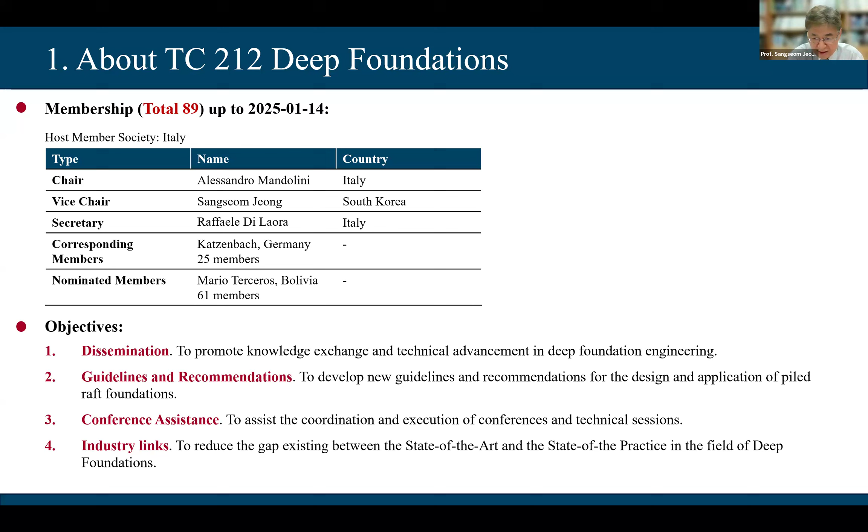Our committee is organizing some activities worldwide. The most recent event was held in Belgium on May 21st this year as part of the SAGE SAND project. Later, a load blind prediction competition was organized by Dr. Mandolini. The competition focused on the prediction of the lateral load deflection response of two hollow steel monopiles for wind farm foundations. The competition participants came from over 10 different countries.

And for another prediction purpose, an ultimate capacity assessment pile prediction event was organized by Dr. Bengt Fellenius regarding the forthcoming static loading test on a driven 18-inch pipe pile in Mobile, Alabama. The survey was conducted among 94 participants from 26 countries to ask for pile head load movement curves and force distributions. And also there's the ISSMGE Sydney conference.

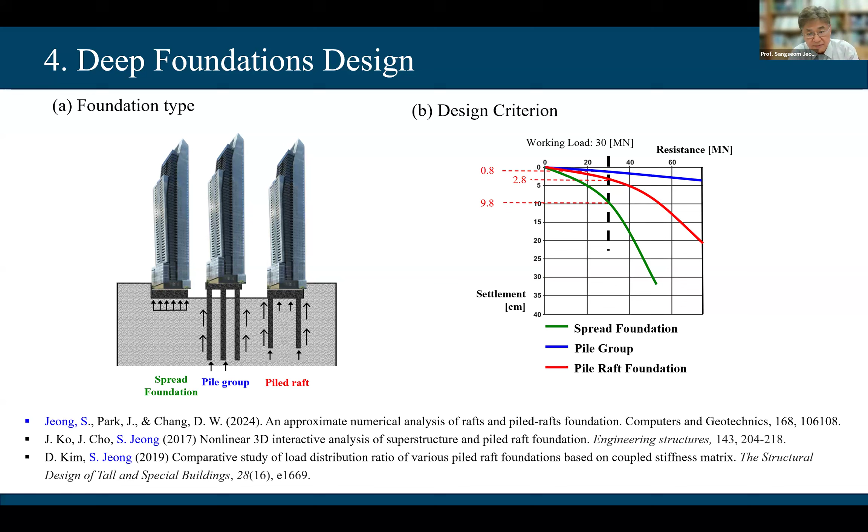Let me introduce interactive analysis. You can see in the left figure there are superstructures and substructures. We can analyze them all together through interactions, which is called interactive analysis.

For this kind of interactive analysis, we need to consider raft flexibility. It's very important to consider the raft flexibility. By considering the flexibility and deflection of the raft, we can overcome some limitations of existing methods. The primary limitation of existing methods is the membrane effect of the flexible raft.

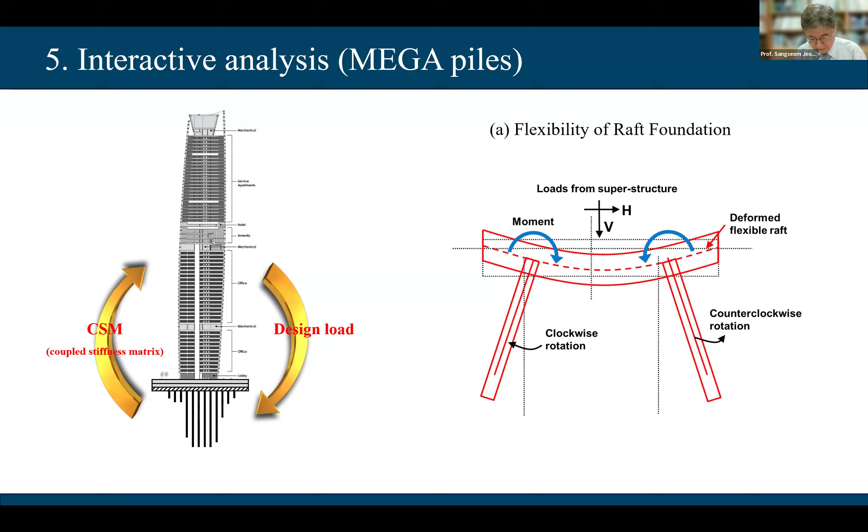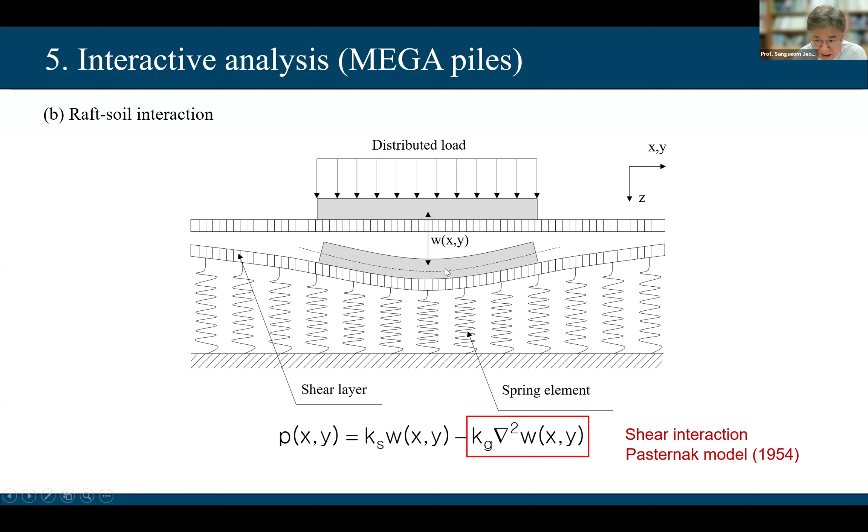In the present method, a numerical technique is developed to combine the soil and pile head stiffness with the stiffness of the raft. Here I'm considering the raft's flexible behavior, taking the flexibility of the raft into consideration, and then including the soil support systems, to consider soil-structure interactions, involving the soil spring coupling effect.

The present method is proposed to improve the interactions of raft-soil-pile systems. Finally, we can propose an analytical method considering raft flexibility, including beam elements to model piling systems with linear or nonlinear soil spring systems. This is proposed as a model to analyze both flexible pile raft and raft foundations.

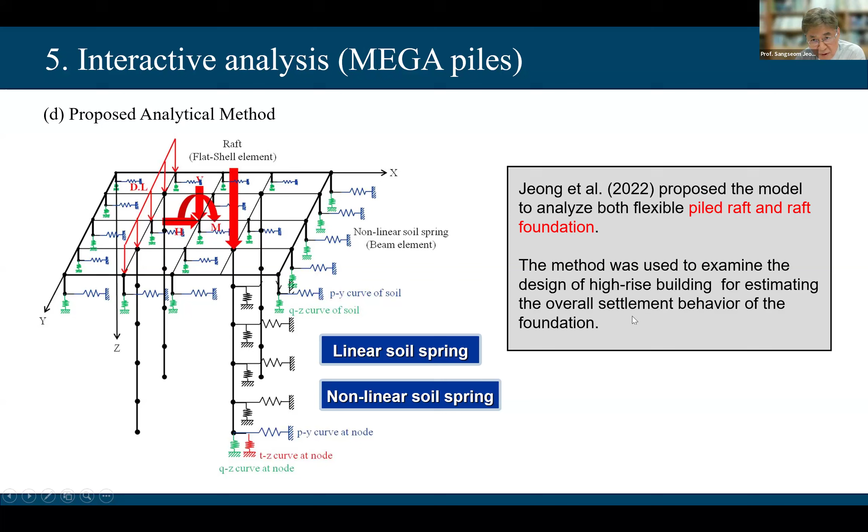This method was also used to examine the design of high-rise buildings for estimating the overall settlement behavior of the foundation.

Let's go into a case study of pile raft foundation, especially in weathered soil rock cases. I call this the Yonsei case. Let me briefly summarize. Here you can see the load distribution ratio of the pile raft foundation of the first engineering hall at Yonsei University, which was measured during construction.

In this case, the load distribution ratio of the raft portion was quantified. This figure shows the schematic of the objective structure and the portion of the foundation. The overall foundation of the structure consists of several independent pile rafts, and each pile raft has 5 test piles. The geometry of the raft is about 3.1 meters by 3.1 meters, with a thickness of about 1.1 meters. The field measurement was performed for about 300 days from the start of construction.

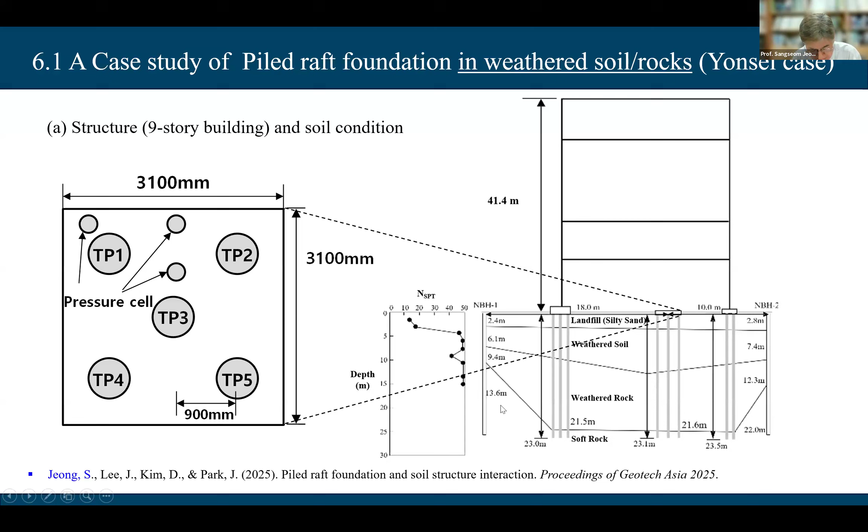This figure shows a schematic representation of the instrumented pile. About 70 vibration wire strain gauges were attached to the test pile, and 3 pressure cells were placed between the raft and the resting soil.

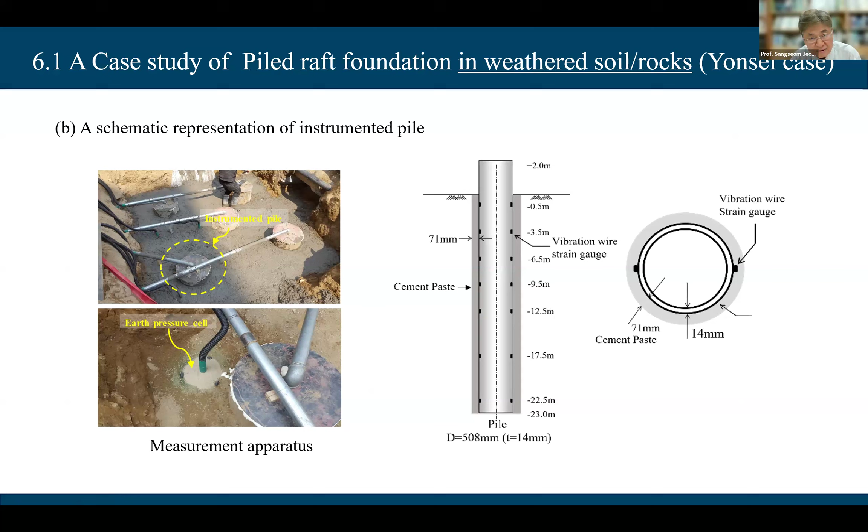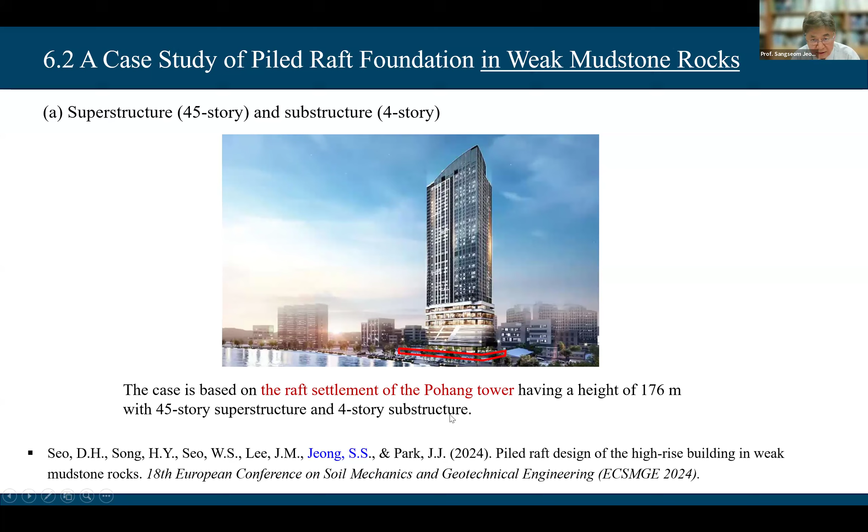Another case is the pile raft foundation with weak mudstone rocks, based on the raft settlement of the Pohang Tower in Korea. The tower was 176 meters tall, consisting of 45-story superstructure and 4-story substructure. Here are the construction stages.

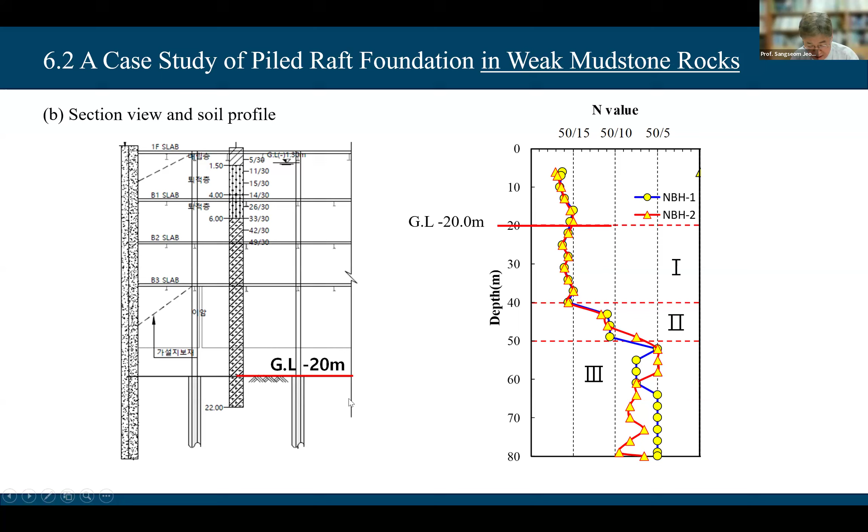Based on analysis using the pile raft design approach, we were able to reduce the pile lengths to an optimal length, from 45 to 30 meters, using pile raft analysis to satisfy the settlement calculations in comparison between pile raft and group piling. The settlement is fully satisfied.

We also checked member forces, especially axial forces and load sharing ratios. The pile raft can satisfy all of the member force requirements, compared to the group pile analysis, which does not satisfy the results here.

So by satisfying all settlement criteria and member forces... Sorry to interrupt, okay. The piles—oh, you're finishing, can you go back 2 slides? Sure, that's fine.

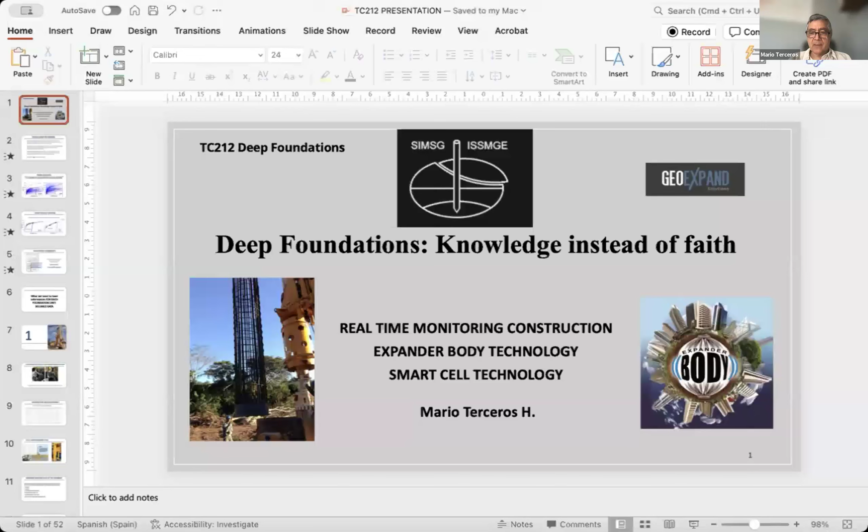I will speak more from the practical point of view, the industry. I will try to show quite simple concepts to be more practical for all the users of the industry. The name of the presentation is Knowledge Instead of Faith, and I will present three types of concepts that can help us move to knowledge.

Oh, what's happening here? I don't know why it's not passing to the next one. It's not shifting slides. Yeah, it's not, I don't know why. It was working well. Wait a second. I will...

What's happening here? Sorry, I will stop sharing, excuse me. I don't know what's happening here. Check it outside and then restart. Yeah, no problem.

Okay. It works, it works here. I hope it works now. Sharing... share, okay, now I will put it full screen since it's working here.

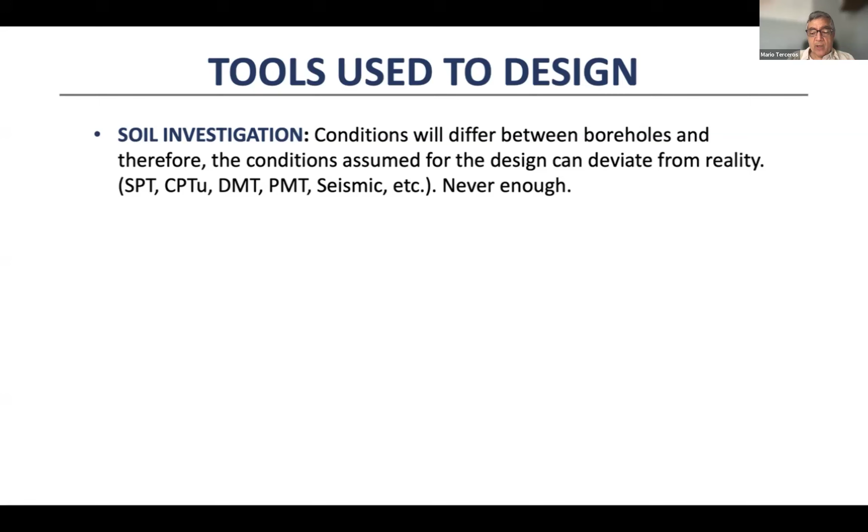Then with the soil investigation, we go to the soil model. And all what the professor presented can be derived from that. So what is the soil model we are using? The old-fashioned is, of course, to use just simple formulas, some experience. Now there are much more sophisticated mathematical models, but always we are depending on the soil investigation and the soil parameters, basically.

The other point to design that is a big problem in several places is that the designer decides what is the construction method, but it is not always respected in the field, mainly in the cast in situ piles. It's not the same to drill with casing than without casing, with mud, with bentonite, or with CFA, the normal one or the partial displacement CFA, and so on. So it's very important to respect what is included in the construction method.

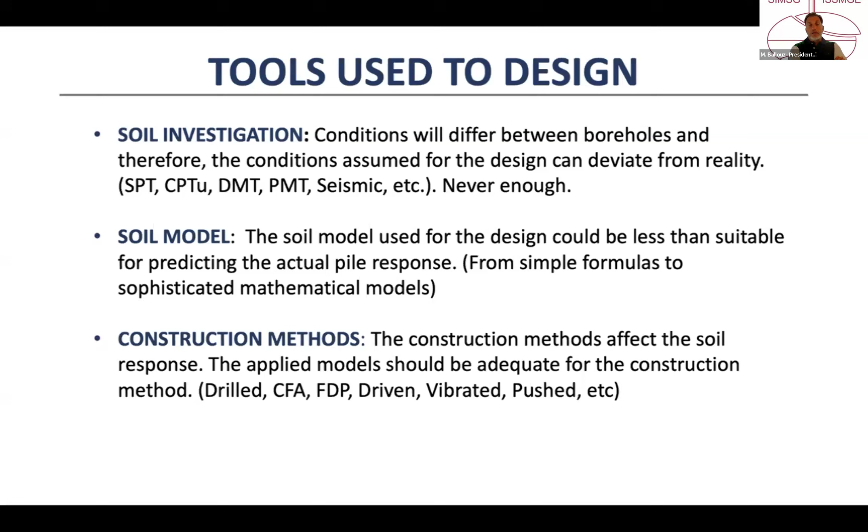Mario, I want to mention when I was doing research, we compared different construction techniques in the field just by forgetting the mud or the bentonite slurry over the weekend, simulating that the pump is damaged, and we came back Monday and poured concrete and did the same pile with good cleaning. The difference in capacity and even the curve was 4 times. I believe it. Totally. Unbelievable. Four times. Yeah, just to complement what you were saying.

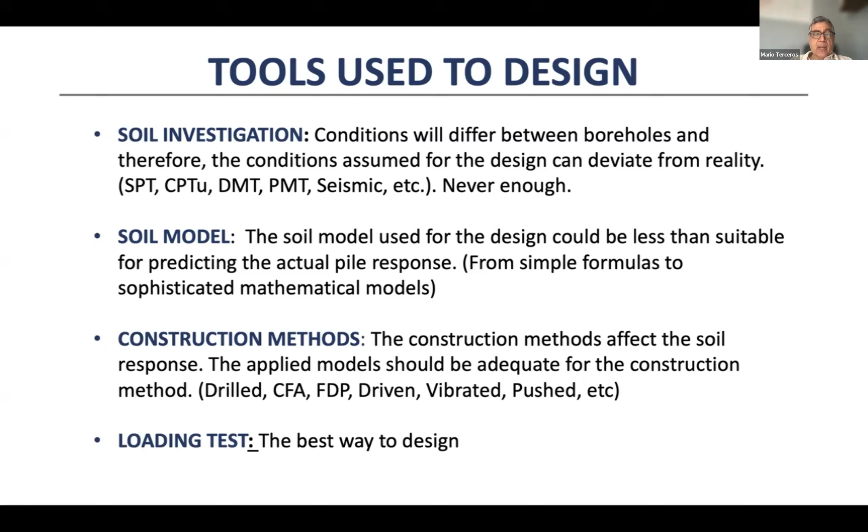Yeah. For example, we have measured, and high quality instrumentation is very, very important. Yeah, and that's because now we are using in 100% of our projects the full displacement pile, which provides 4.5 times more than the drill with bentonite. So the technology is very important, and of course, the loading test. If every single project would be designed with the help of a loading test, everything will be different. We are trying to do that in almost all our projects, but it's not always easy to convince the clients.

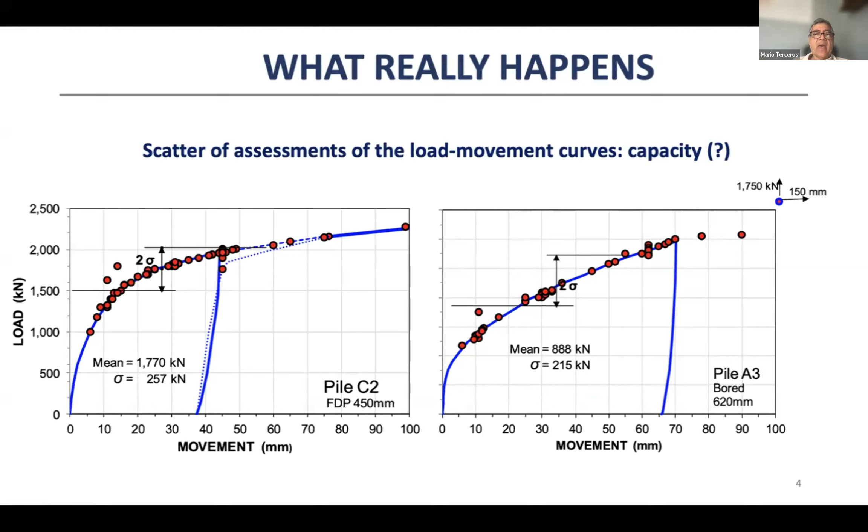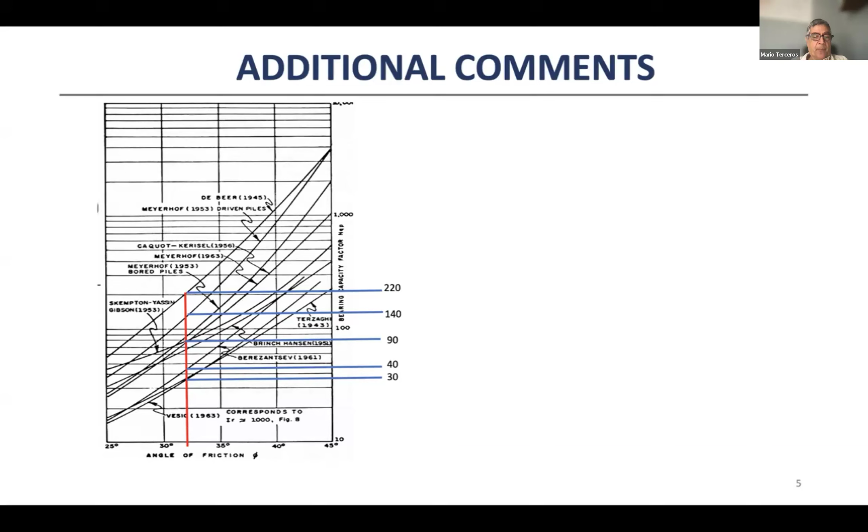Some comments. These are the very old curves for the tip resistance of driven piles for different authors. Depending on the author, you can have Nq of 30 or 220. Okay. Nobody's wrong, but the problem is what's happening here. First of all, we have to know what is behind the model that gave the curve. If we don't know that, we will use it in the wrong way.

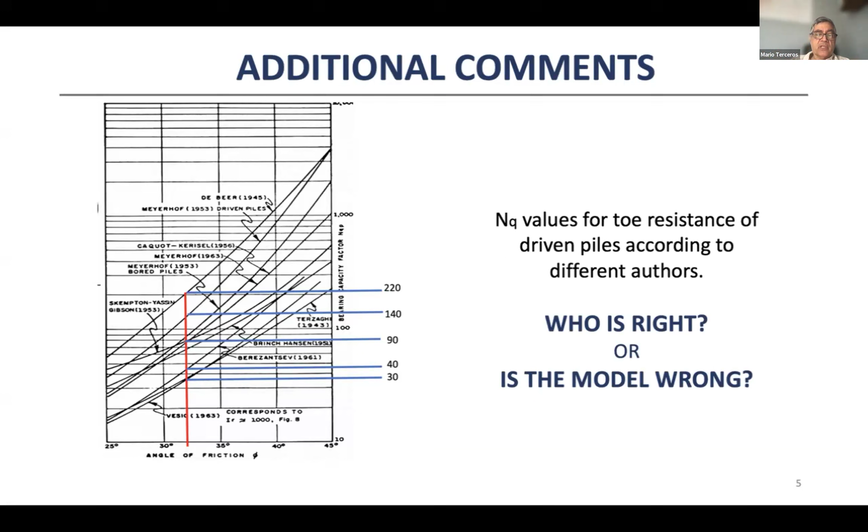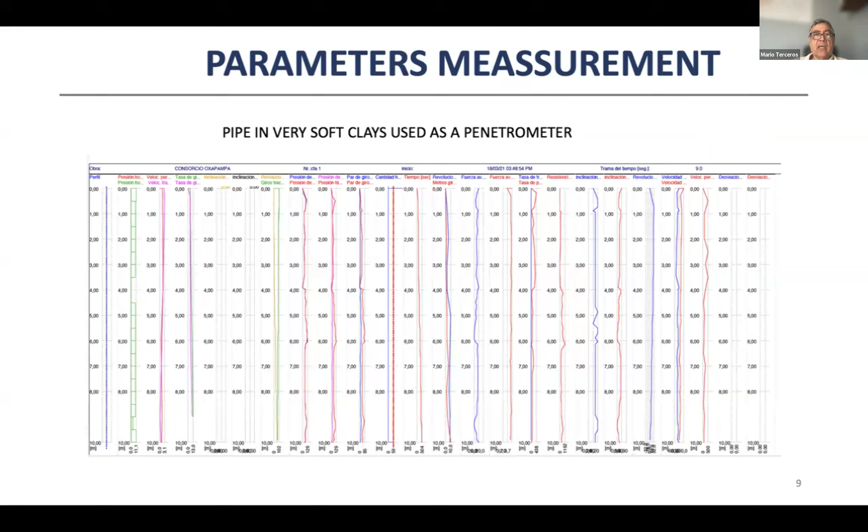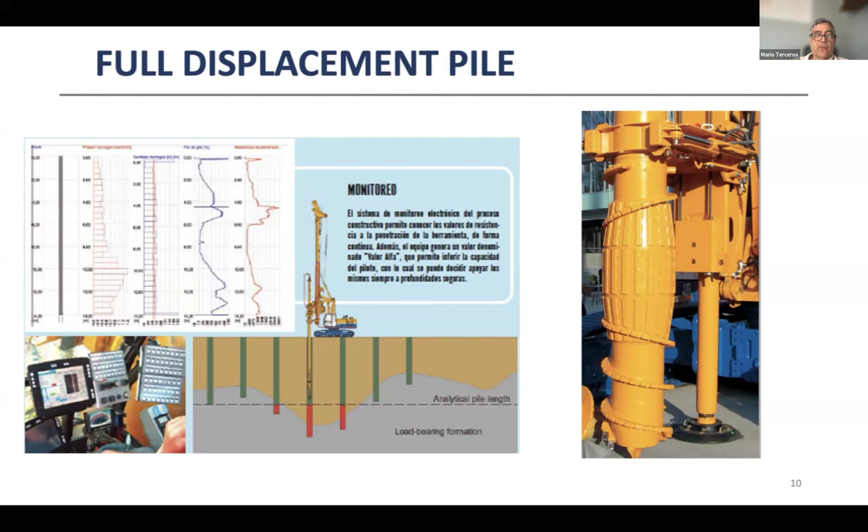In the other case, the full displacement piles, it allows us to see if the analytical pile length is right or not, because the truth is in the soil, it's not in the paper. So with a good support, we can do that.

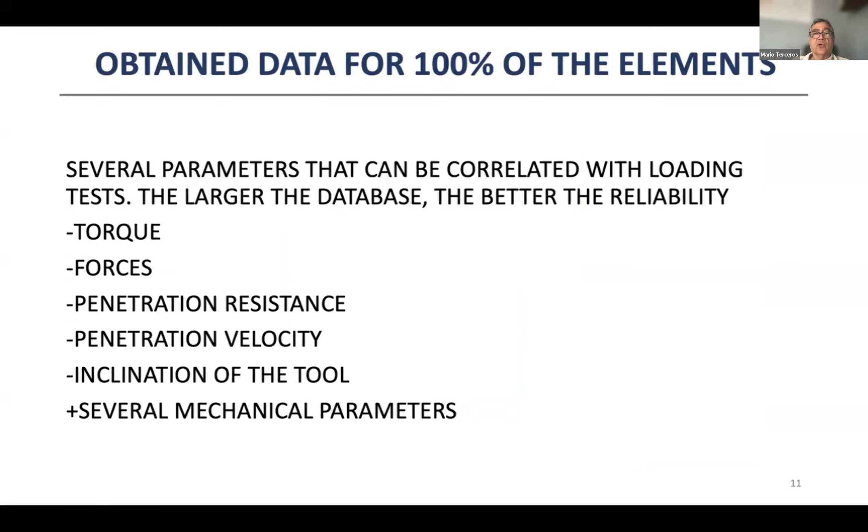So we get, for the 100% working as a penetrometer, the tool of drilling, a lot of information like torque, force, etc., which is very helpful once you know how to correlate with the values. So another question is, why don't we install systems that can give us information also in 100% of the piles?

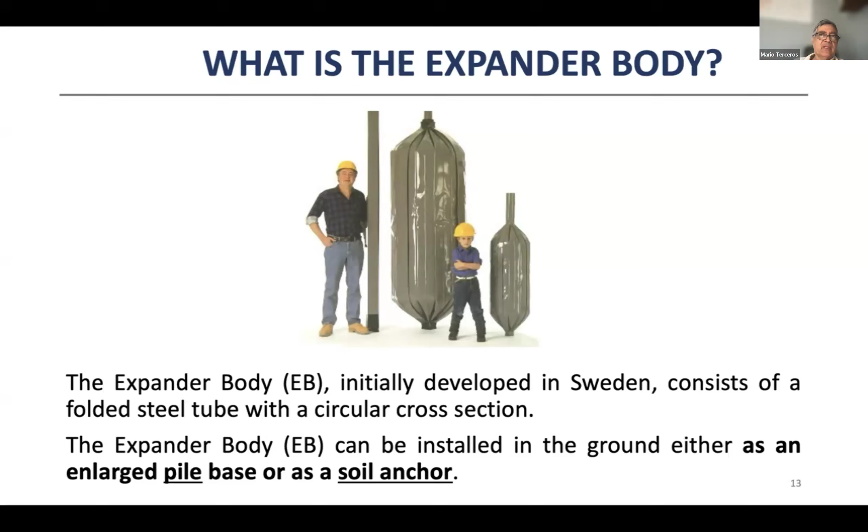This technology, the Expander Body, is basically a steel pipe that is folded, installed on the tip of the pipe of the pile or of the anchor, and then injected. So you pass from 12 centimeters to 80 centimeters. So you imagine the forces involved in such expansion. So it's not only because of the enlargement of the base, but also because of the compaction and the shear strength improvement, the stiffness improvement of the soil. So, okay, this is a very basic way of showing how it expands.

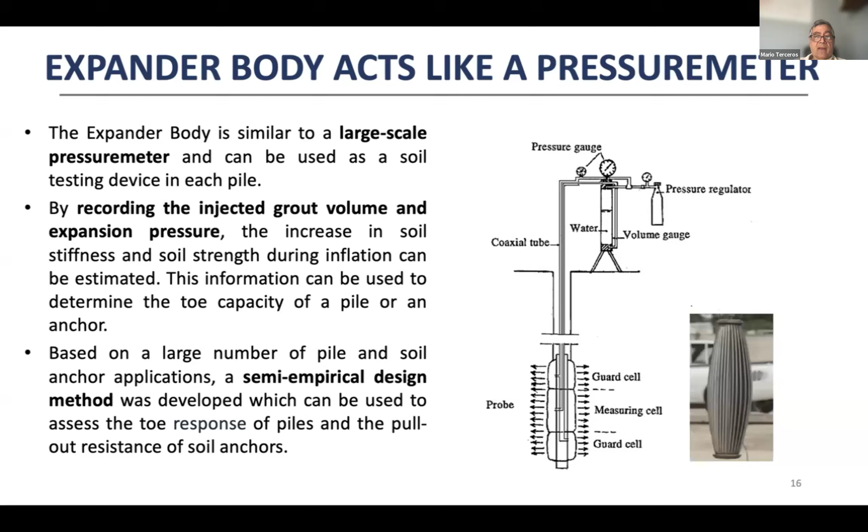What we do is we measure in every single element the horizontal stresses. And the curve I will show you, in the case of the anchor, is a very large displacement pressuremeter. Those are the standards, and the shape of the curve is exactly the shape of a pressuremeter, in case the pressuremeter would have been able to get to the limit pressure. So we have the initial phase, the elastic phase, and the yielding phase.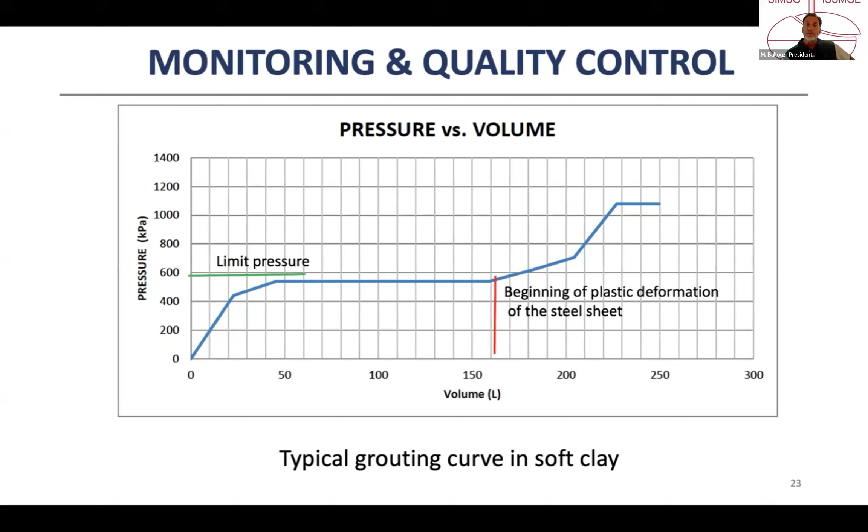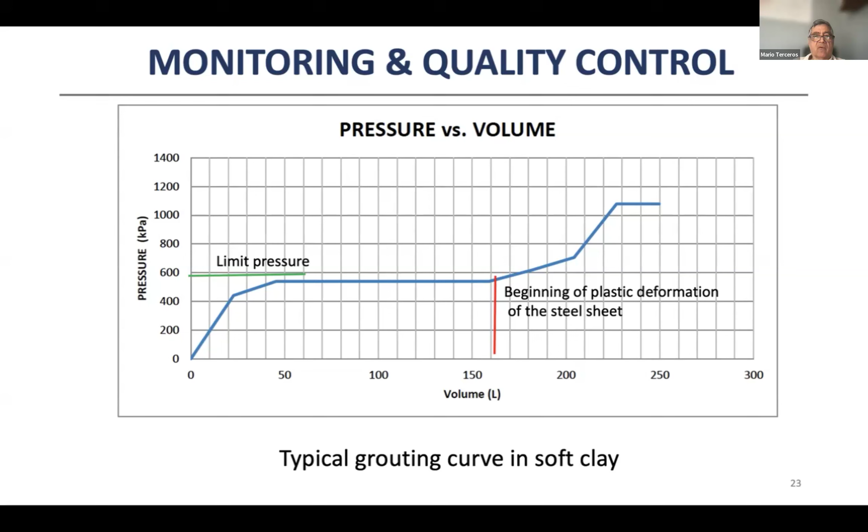Who's manufacturing those tubes? I barely saw Switzerland. No, it was invented in Sweden, and then we made an agreement with them because it's not produced in Sweden anymore. Now we produce in Bolivia and Brazil, and we have installed more than 40,000 of these elements.

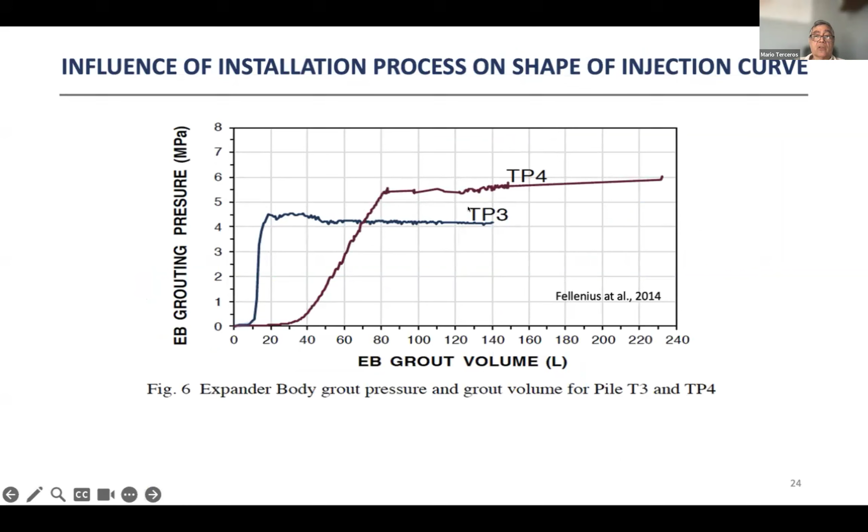Here's a very interesting case where we have a bentonite pile and a full displacement pile. This one is much shorter, and the results were also very, very impressive. In this case, we measured the friction to be 4.5 times less in the drilled piles than in the other one. Those are the models, it's not important.

How much in US dollars for each, let's say 1.2 meter? It depends on the quantity and things, but in our commercial experience, it costs double and it resists more than triple, that's a point for the clients to understand more clearly. And in case of micropiles, the increase is about 6 times. So it is important to design which size of expander body we want, because we have from 300 millimeters in very stiff soils or very soft rocks, up to 800 millimeters. And now we are developing the one with 1.2 meters in diameter.

But the price will be... Very exciting. Yeah, the price will be... I have one more question. Sorry, I'm so excited. Sure.

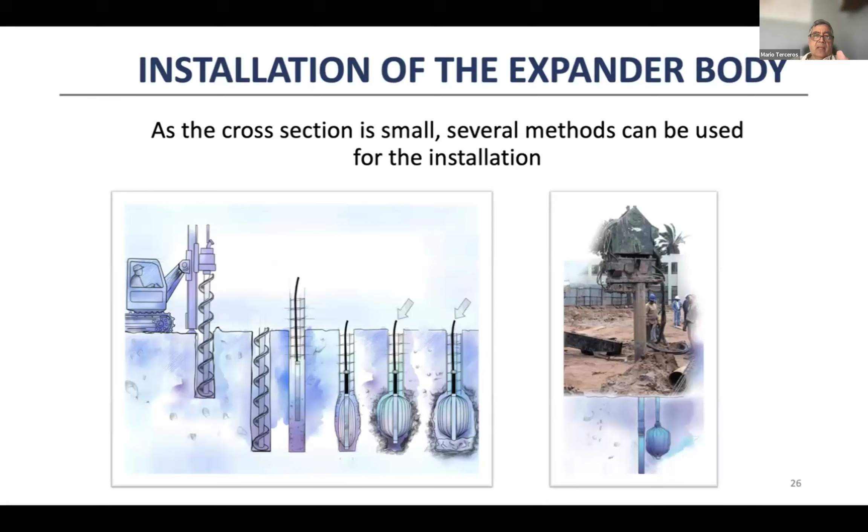I can see the benefit for uplift, does it take uplift? Is there a connection in terms of tensile steel, or just vertical compression? No, it uses anchors too. In anchors, I think I have an image here. First of all, you can install it with whatever you want because it's a simple thing. This one, the case on the right, was in Stockholm in very soft clays, where they pushed with a jack down to the granite.

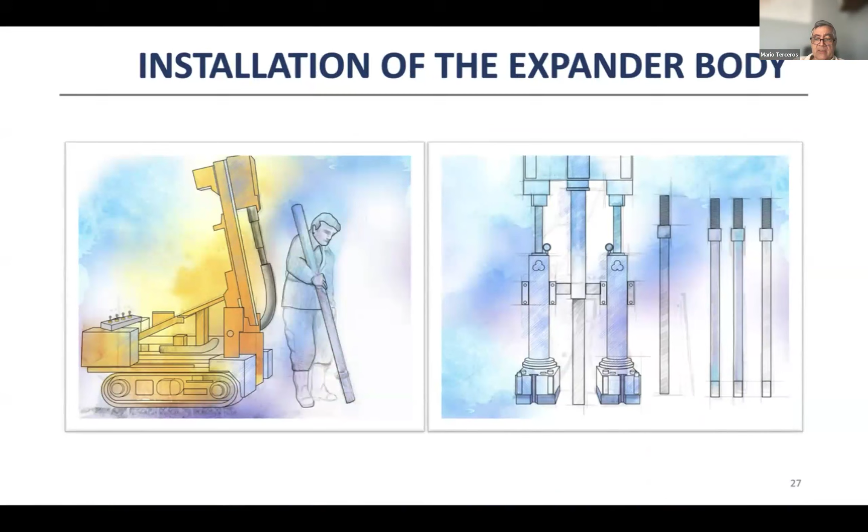So it's very easy to work in very small places or in big ones. But the tube can take tensile forces? Yeah, I want to show you that. It was originally designed for anchors. In tensile forces, we can increase 4 times against a typical anchor. And in compression, of course, it's also that.

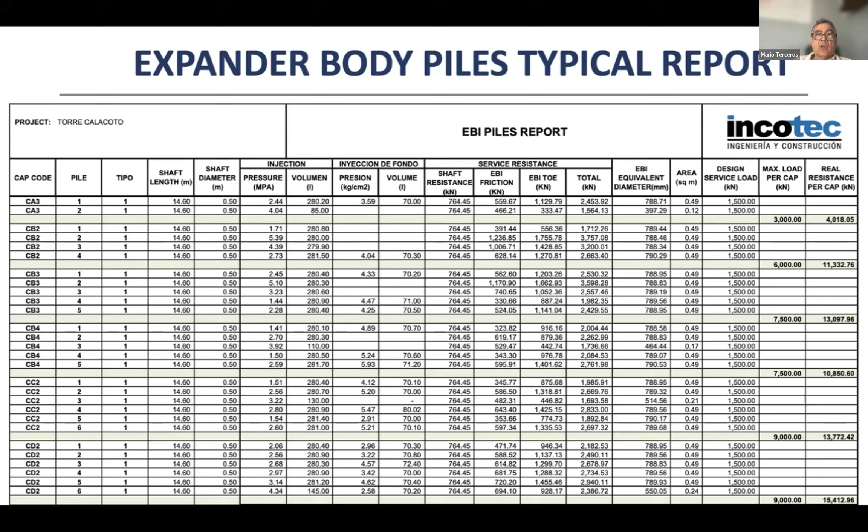This is a typical report we get with the expander bodies and with uplift design, so it's good for warehouses, wind uplift, turbines, and also for anchoring retaining walls laterally, and this type of things. We also have developed a post-grouting in very loose sands. It helps very much

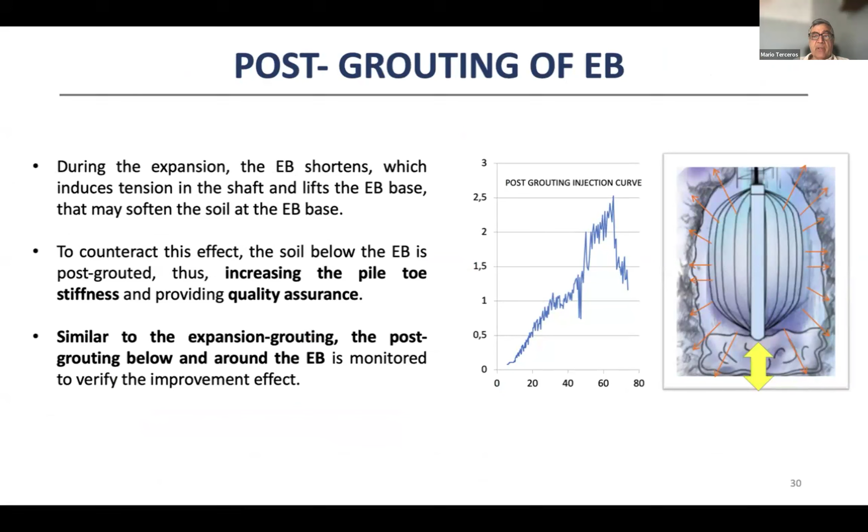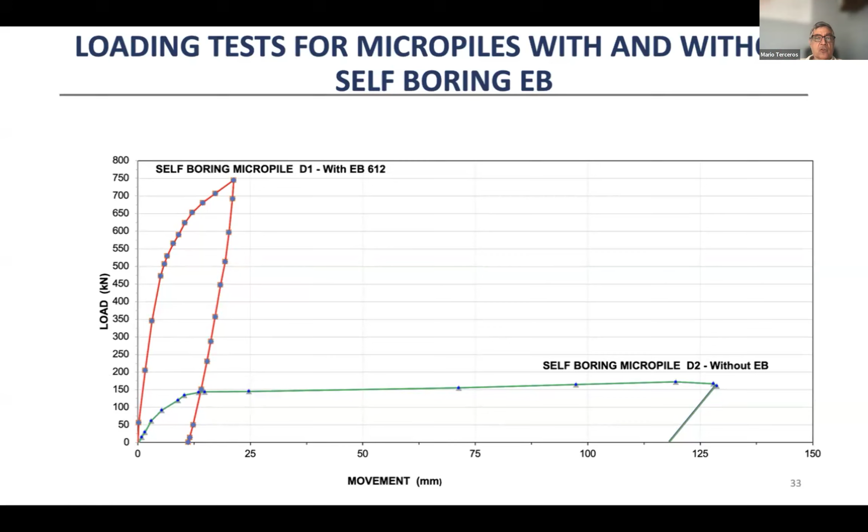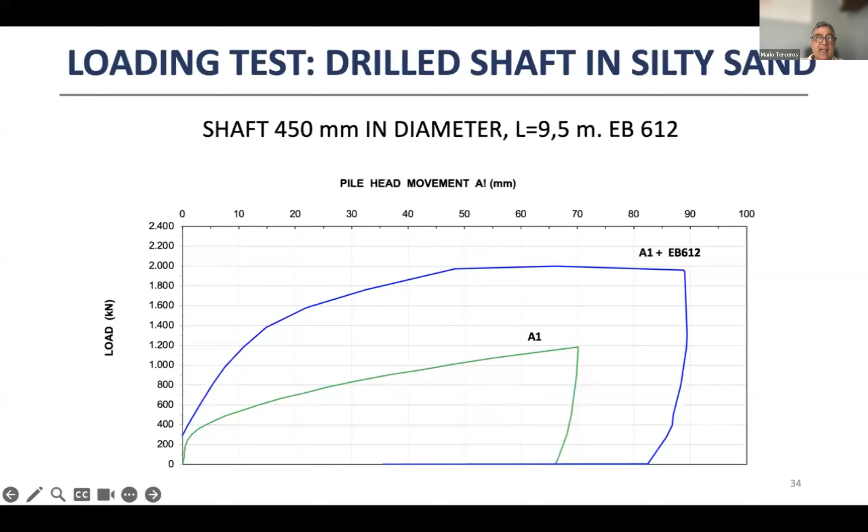in quite bad soils, because micropiles are mostly used where you have strong soils and rocks and so on. But in places where we have sedimentary soils and we don't have really a good resistant layer, the micropile is also a good solution. And with expanded body, the benefits are immense. This is a case with an expanded body in this experimental site that Professor mentioned. If we take, let's say, 25 millimeters, the one with expanded body is around 1600 kilonewtons, and the other is around 800. So it doubles the resistance even in a quite big shaft.

In anchors, here it is. It was a test in Boston. We have performed 2 projects in Boston, one for underpinning and another for a new project. And this was a test for anchoring. The blue one is the typical one. The other was with a small expanded body, and the other with a 600 millimeter expanded body. See the differences. So it's really very important.

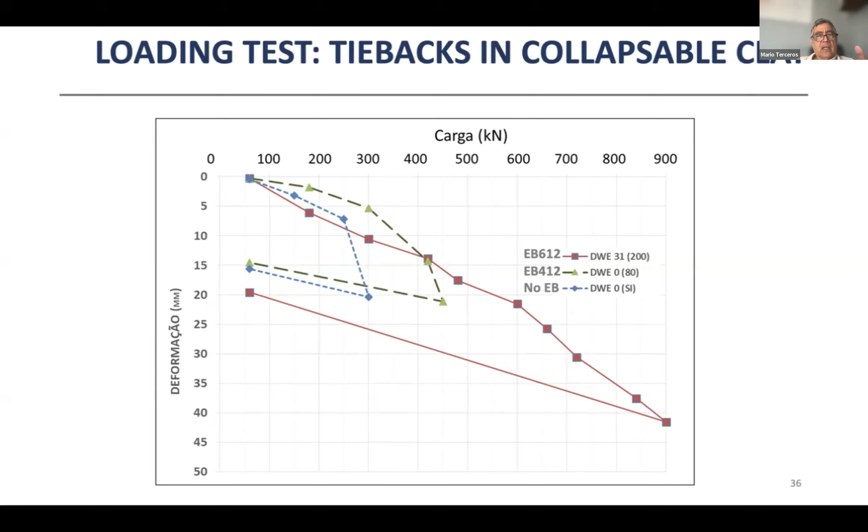Sorry, I'm talking too much. No, it's okay. How thick is the skin of this metal that expands? It's metallic, right? It's folded, it's a special steel of 1 millimeter thick. One millimeter. Yeah, it is really interesting, and I will send you later more information. I will Google it. You don't have to. I want to buy it anyway. I have several good papers, and there are several investigation papers performed by other people. So it's a very interesting thing.

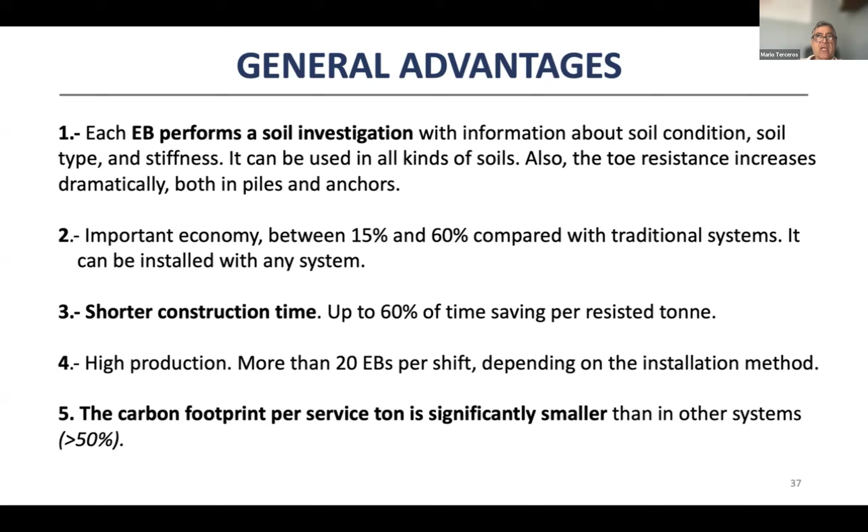So advantages. It performs a soil investigation at the tip because it is a pressuremeter. It gets immense economies in general, and as the service load is larger, you use less elements, so the time is also good. Construction time: the productivity with one of our power machines is always over 20 piles per day, typically 30. And the carbon footprint is important. Here I say over 50%, but we have measured in one case a reduction of 80% of carbon footprint because of the increased capacity of the piles. So what data do we obtain for 100% of the elements? Horizontal stress, injection volume, and pressuremetric curve, where we can get a lot of information. And the last one

is what we call a smart cell. It's basically an Osterberg cell, but we use it only at the tip of the pile, because in that case we compact the debris, then we compact the soil, and at this level we have already pre-mobilized and preloaded the soil. So when you load the pile, you will have the same deformation for the shaft and for the tip, and it will start to move really after the force we already put into the soil.

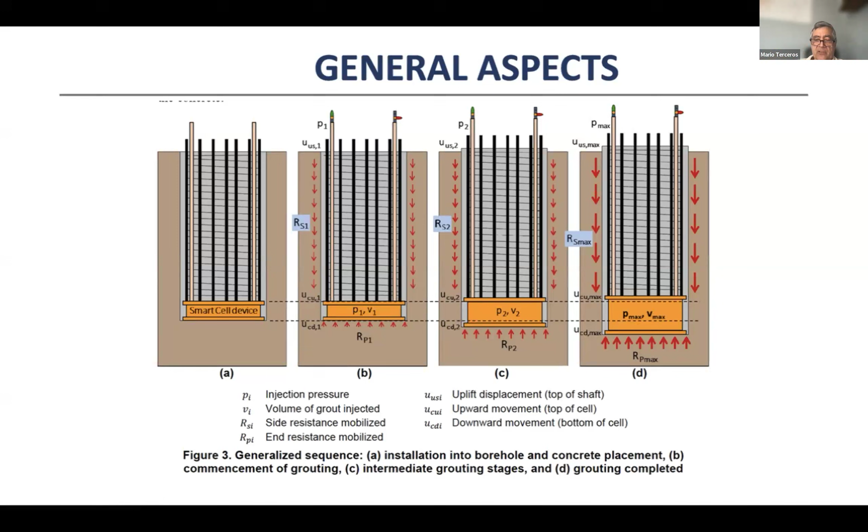So it's a quite simple concept, and the trick here is that we instrument every single cell with a telltale. So we perform a loading test for 100% of the tips of the piles. And in some cases, when we can mobilize the shaft, we also measure at the top, and we get the load movement curve also for the shaft.

Okay, those are just pictures. Here is a case where you see it start with 11 of stiffness, and at the end is 115. So it is 10 times more. And in some cases, we have measured an improvement of 30 times more of the stiffness, comparing with the pile in the original conditions. So, okay, here we have more details, but the question is that we really can get major improvements. Here in Bolivia, we have used it in several bridges with very good results.

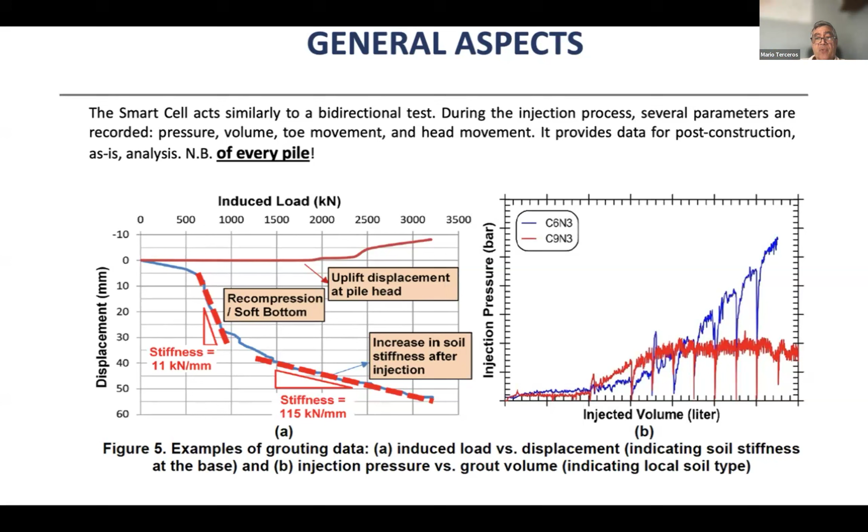And in Paraguay, we have designed a smart cell where the typical drilled piles have a very good cemented sand. The typical capacity or resistance, the service load, was around 40 to 50 tons. And with the cell, they are always over 140 tons. So it means that just using an element that provides this improvement of what we have measured during the construction, we can increase the resistance and lower the quantity and so on. And of course, from the carbon footprint point of view, the results are really impressive.

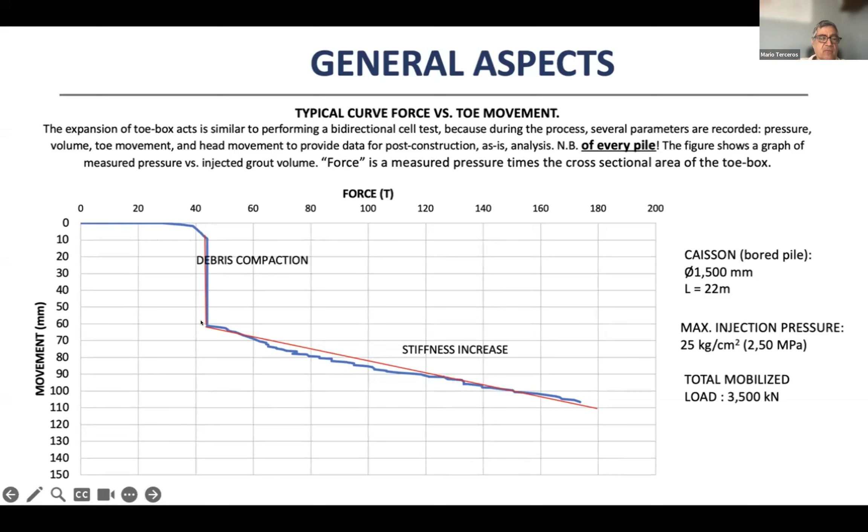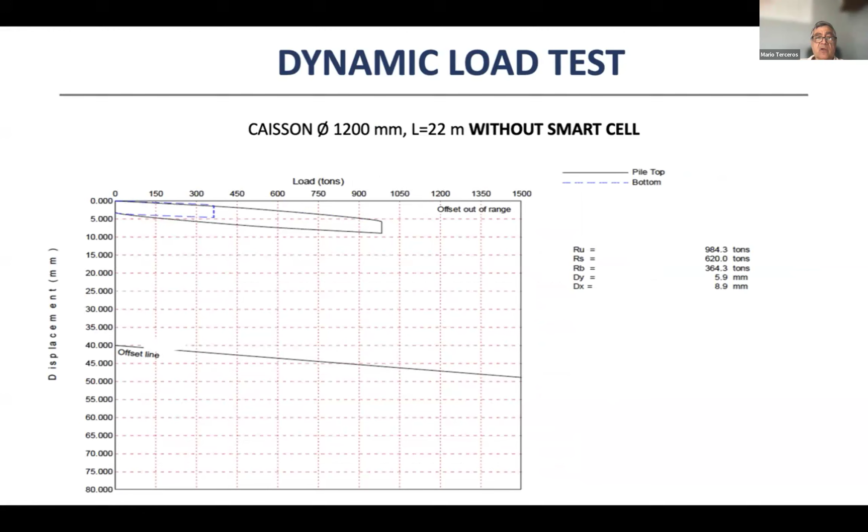Here's a case where, just to explain, this original part is because we used to have some welding points in order to know when the cell starts to open. Then you see the debris compaction with almost no increase in force, and then the stiffness increasing. In one case, we performed for one bridge a dynamic test in one pile with and the other without cell. The results were like it shows here. The tip was 870 tons for the one with cells, and it was 300 tons for the one without cell. So it means that just putting the cell, the resistance of the tip increased 500 tons.

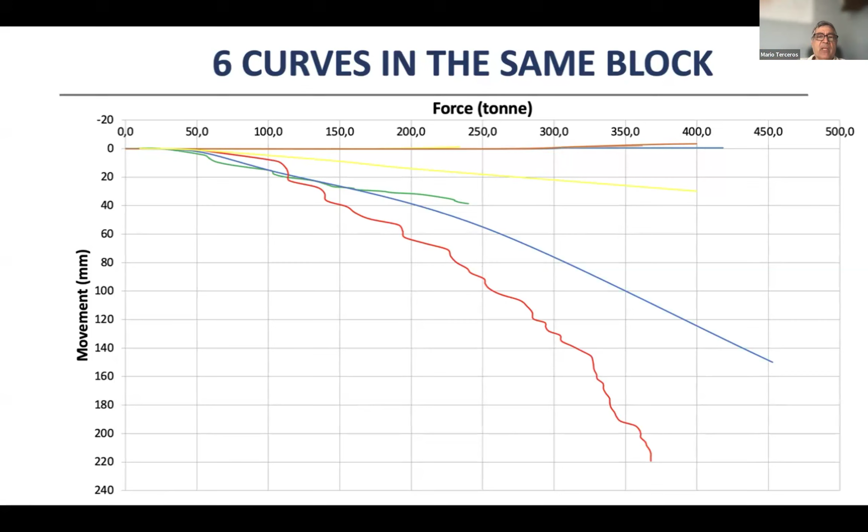And I show those curves because here we have 6 curves, one very stiff, another very soft. Those are the curves for just one foundation block in a bridge. So you can see the difference of the soils, because in those rivers that are quaternary rivers, the variation of soil conditions is immense. So here you can see that in case the solution would have been without these systems, it could have had some problems in settlement. So thanks to that, one more pile was included in this block in order to get basically no differential settlement in the block. So again, it's an investigation device.

Benefits: cost, time, quality control, and flexibility, because we have used it in very small shafts up to 1.5 meters. And with that, you can reduce the length, the diameters, and so on. One of the points I'm always focused on is trying to use piles as slender as possible and with the highest concrete quality possible. There, the benefits are immense, and from the carbon footprint it is also very impressive what happens with that.

So the idea was here what we obtain: again, in 100% of the elements, we know the vertical movement at the toe and the head, the vertical force, force at the toe, friction force, and we can get the load movement curve for 100% of the pile toes. So I have asked several friends that are designing what is the real resistance of the piles, and the answer is always, okay, in the one we performed a load test, it is that. And I say, and in the others? I don't know, is the answer. Here we know. So that's why I say we can pass from faith, we believe that they will behave like that, to knowledge. Now I know how they will behave.

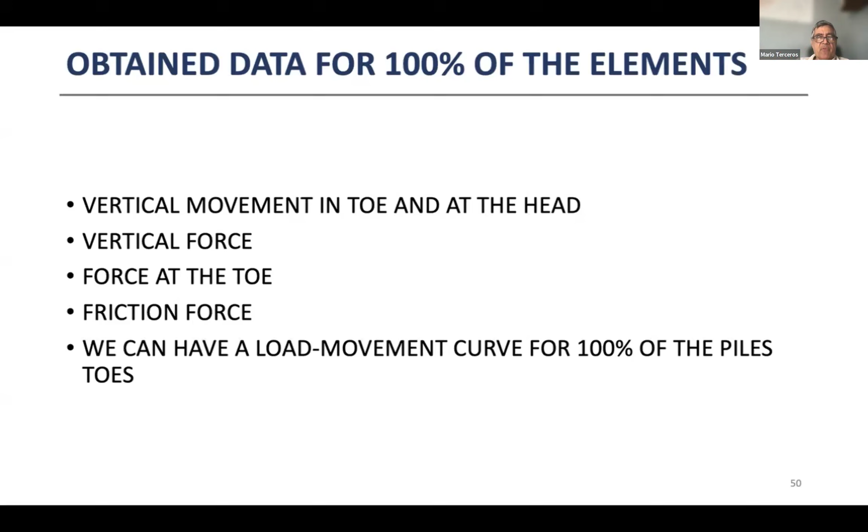So the idea is to show something more practical from the industry point of view. So what is the idea? To get all these benefits. Less time, economy, highest quality control, and so on. So I spoke fast because the time was not long enough, but thank you very much.

You did well. Great. Very exciting information. Thank you, Mario. Thank you. Floor is yours, Raffaele. Thank you. Thank you. Can you see my screen? Yes.

Okay, so I'm going to present some recent developments in pile foundation design with a particular focus on the behavior of pile groups under generalized loading conditions. That is a topic of particular relevance nowadays, since as civil engineers, we need to design structures and infrastructures that are increasingly demanding due to the environmental loads, the impacts of climate change, the great urbanization, and so on.

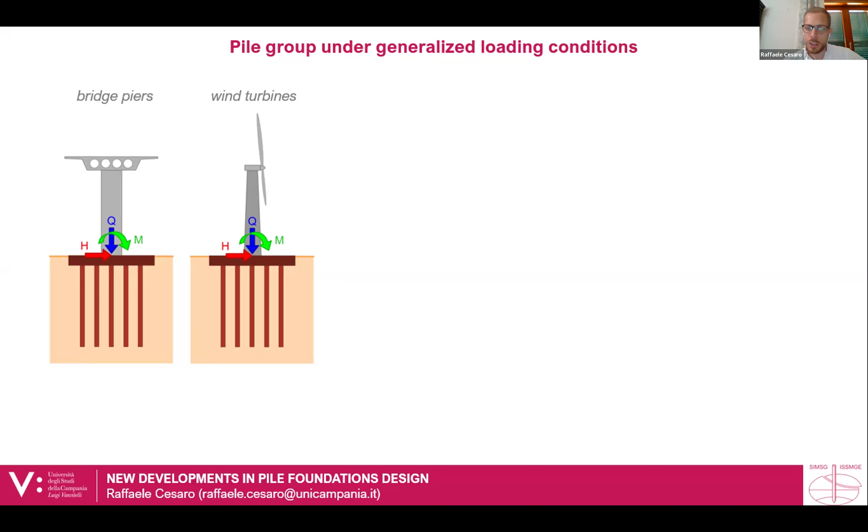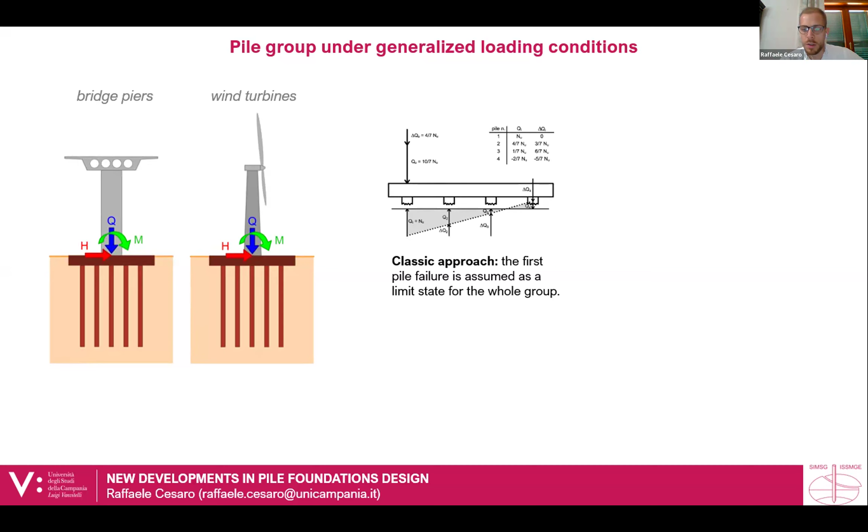So for a pile group subjected to a vertical eccentric load, according to the classic approach, the external load that produces the axial resistance achieved in the most loaded pile is considered the failure load of the group. But we know that this is a very conservative approach, since the ductility of the system is neglected. Indeed, the axial resistance is not achieved in the other piles of the group.

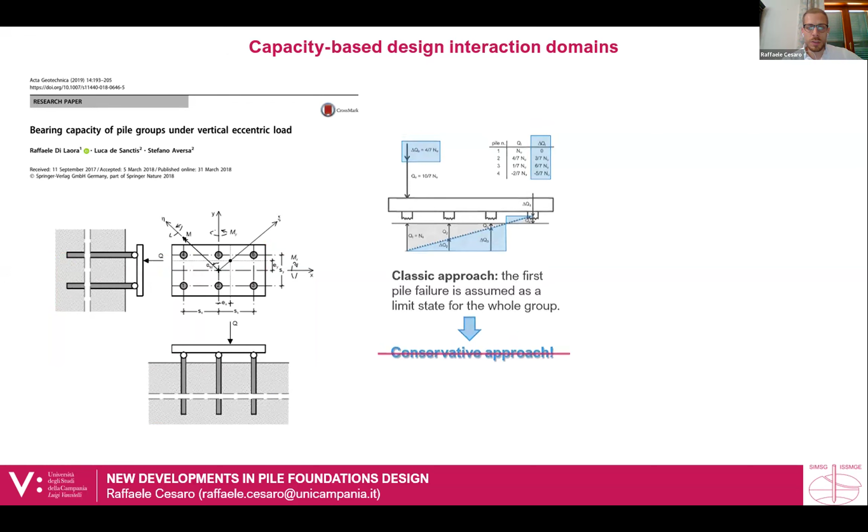So to address this issue, 6 years ago, in 2019, Professor Raffaele Di Laora and co-authors, Professor Luca de Sanctis and Professor Stefano Aversa, published this seminal work proposing an analytical solution based on the theorems of limit analysis for the construction of the interaction domains of a pile group subjected to a vertical eccentric load. This is based on simplified hypotheses. Indeed, the piles are modeled as rigid plastic independent uniaxial elements, and the contribution of the raft is neglected.

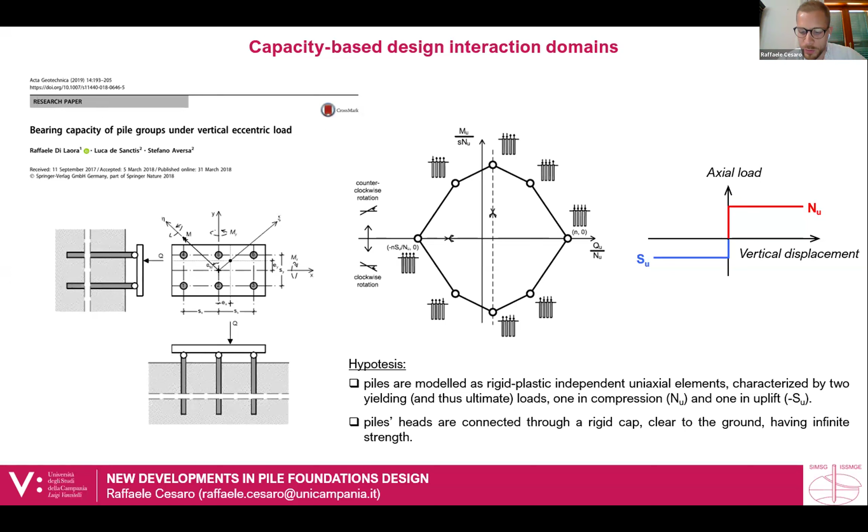I have to say that interaction diagrams are commonly employed in the design process of shallow foundations, massive embedded foundations, skirted foundations for offshore applications, and so on. But in piling engineering, the routine design is slowly adapting to this new philosophy. So let's look at the practical impact of this design tool. This is an application to a real case history. This is an onshore wind farm in southern Italy.

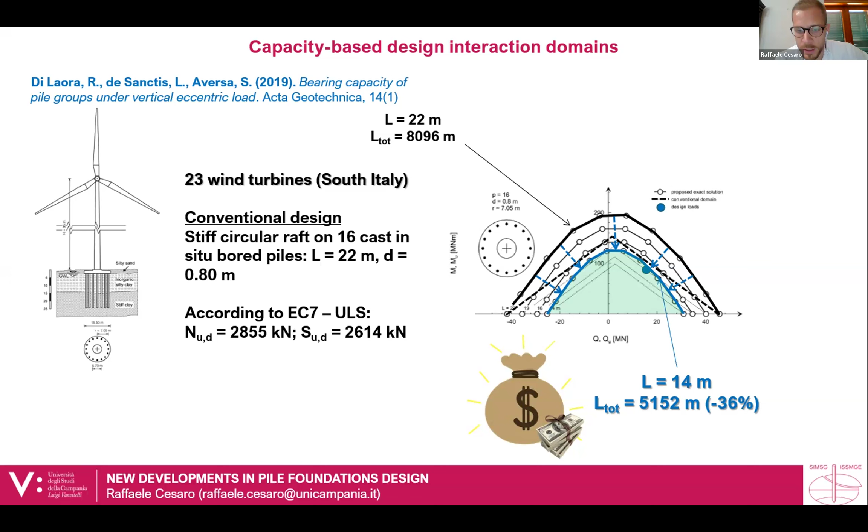So adopting this solution, we can optimize the design, and for this pile diameter, we can adopt a pile length of 14 meters. So we obtain an overall reduction of 3 kilometers in pile length for the whole wind farm. So this is a great economic gain. But of course, here we are not only saving money, since we are also reducing the carbon footprint, and we know well that nowadays this is not secondary in the design process.

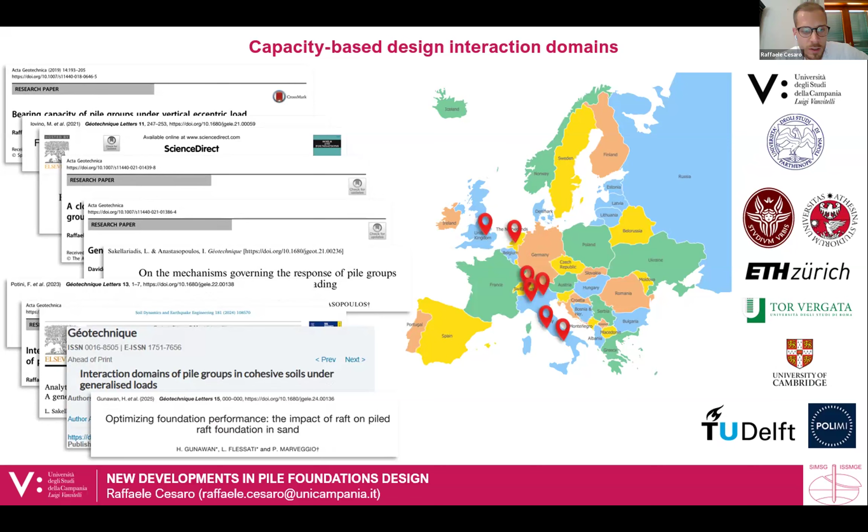So starting from this first publication, given the great practical impact, the interest started to grow rapidly from academia and from companies. So now we have a lot of researchers working on this. So it's, let's say, a hot topic. We also tried to take a step forward, adopting this approach not only for a capacity-based design, but also for a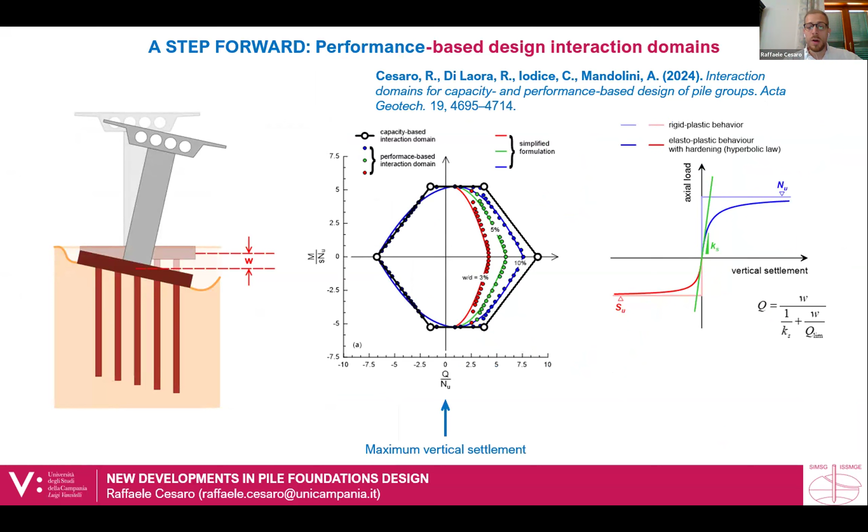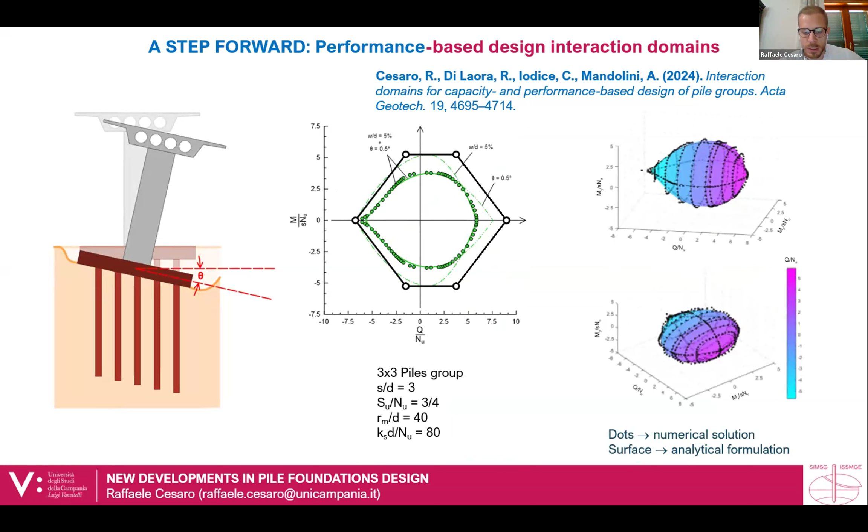settlement-based design. Indeed, we proposed a solution to obtain interaction domains for a fixed maximum value of vertical settlement of the foundation, or of a maximum value of the cap rotation, that is the parameter that usually rules the design of wind turbines, for instance. Or it's possible to obtain interaction domains for both fixed parameters, so a maximum vertical settlement and a maximum cap rotation.

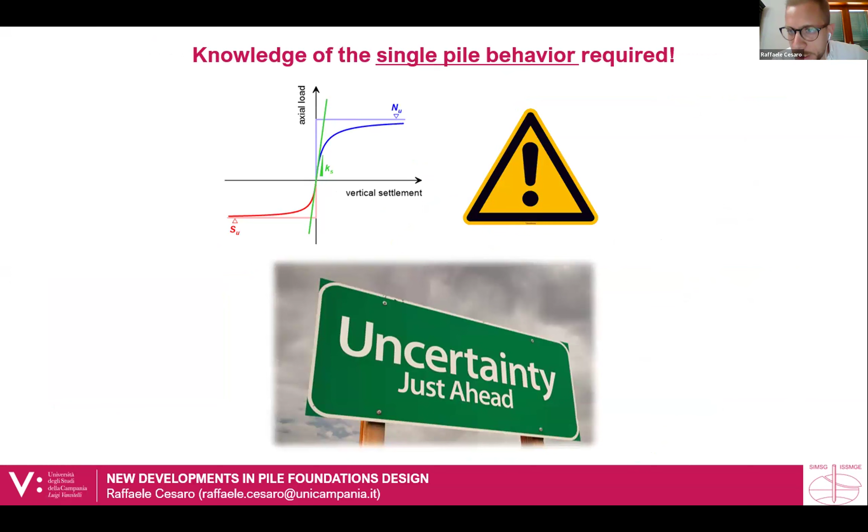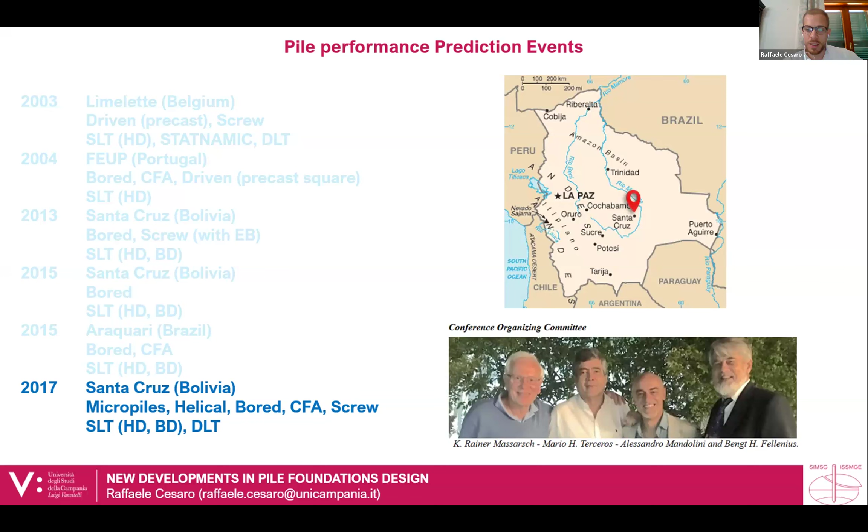However, we have to keep in mind that any evaluation of pile group behavior requires knowledge of the single pile behavior. But unfortunately, from the results of the international prediction events that have taken place over the last decades, the results are not encouraging about our predictive capabilities. Indeed, looking at one of the last that Mario mentioned, organized within the activities of this technical committee in Santa Cruz de la Sierra in Bolivia in 2017, and thanks to the willingness of Mario, who spoke before me, looking at the results, some of which Mario already showed,

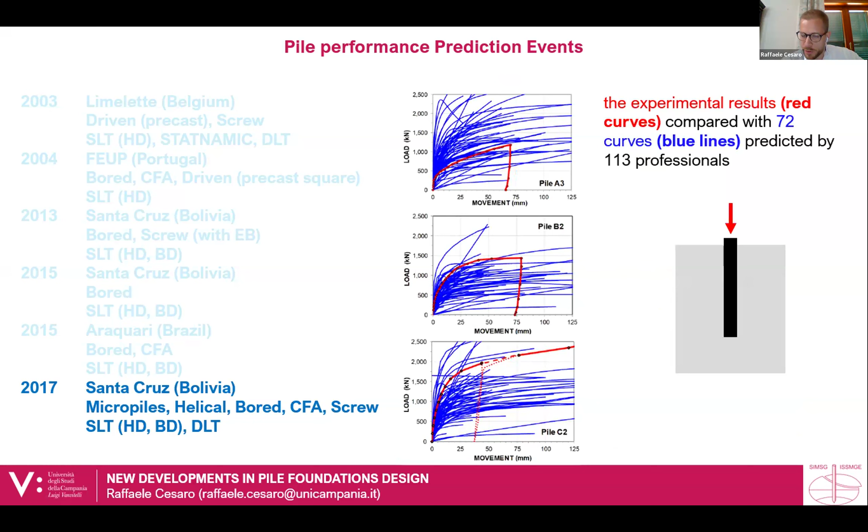we can see the red curves that are the results of the pile load tests, and the blue lines are the predictions from professionals from all over the world. The results are self-evident, and they don't need other comments, but this level of uncertainty is a paradox for me as a geotechnical engineer, since the evaluation of the single pile behavior under axial load is the first step in the design process of any deep foundation system.

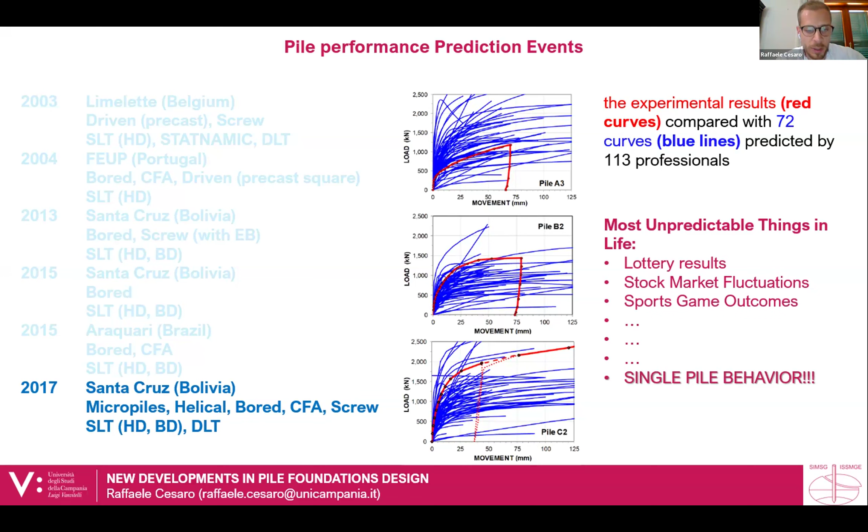So for this reason, I agree with Mario that trial pile load tests are always the most effective design tool. But this is, let's say, a practical point of view; from a theoretical point of view, we have a lot of work to do. And about that, we are also working a lot on single pile behavior, for the moment focusing on the behavior of cast in situ piles in sandy soils.

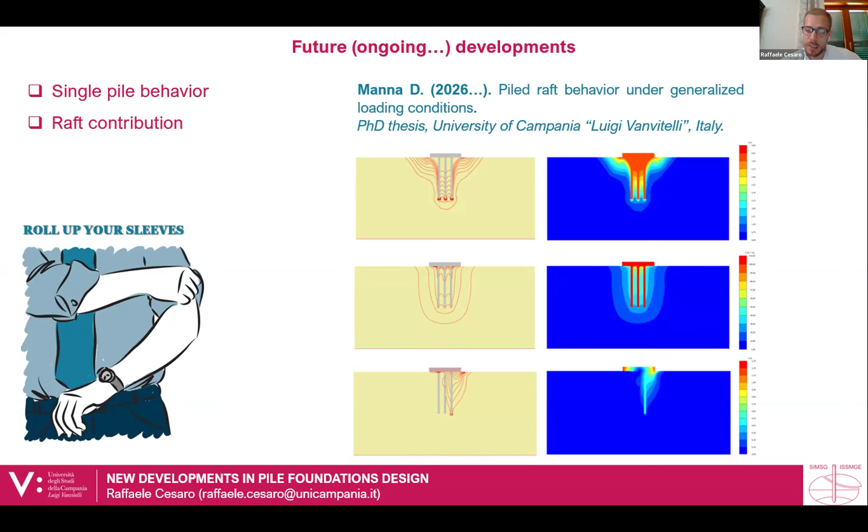And furthermore, with regards to the behavior of piled rafts, we have to understand and quantify the contribution of the raft under generalized loading conditions, which nowadays is still a big issue.

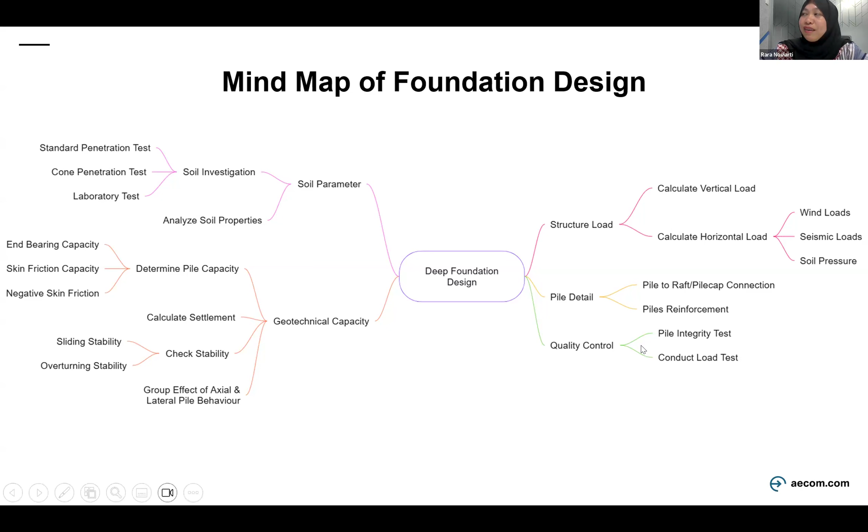So with that understanding, I will now begin by listing a few challenges I have encountered so far. I'll be sharing my own perspective, and I will be very happy if we could discuss this point together.

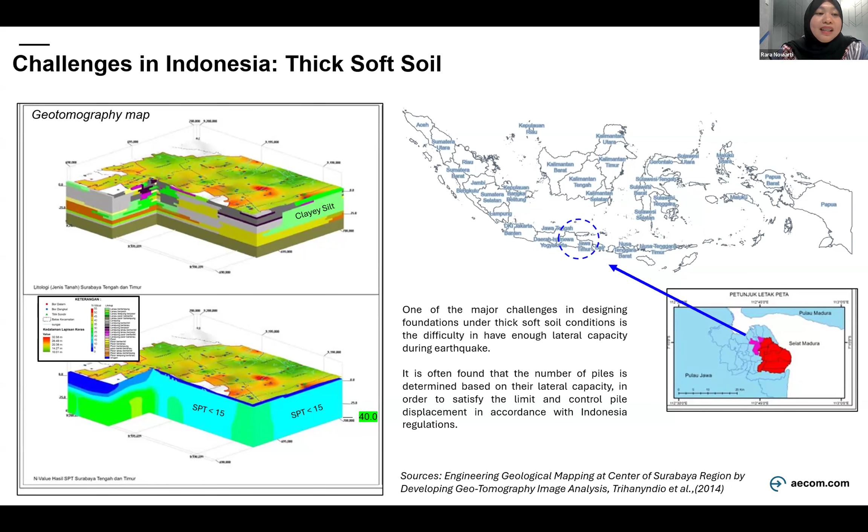One of the major significant challenges in Indonesia is dealing with thick soft soil, especially in coastal and delta regions like Surabaya, as you can see here. This geotomography map shows a 3D visualization highlighting the presence of clayey silt, shown in green color. There's a remark that the soil has SPT less than 15. In such an environment, one of the main design difficulties is achieving adequate lateral capacity, especially under seismic loading. During an earthquake, lateral forces can cause excessive displacement of the pile, which must be controlled to meet the requirements of Indonesian national standards. As a result, in many cases, the number of piles is not governed by vertical load capacity, but rather by the need to satisfy lateral performance criteria.

Second, we have to consider the settlement. The pile cap or raft must be designed to accommodate differential settlement because of this thick soft layer, which can lead to the need for larger reinforcement or thicker raft.

From a construction standpoint, there is a risk of pile interaction where driving one pile can cause movement in adjacent piles, especially in this soft ground. This requires careful planning of the pile driving sequence to minimize the displacement.

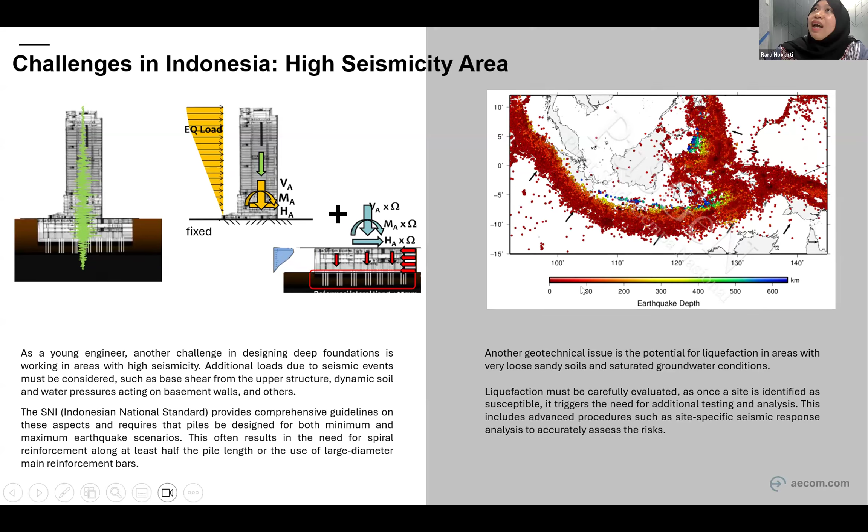Another ongoing challenge in Indonesia is inconsistency in laboratory testing capability, especially outside major urban centers like Jakarta, Bandung, or Surabaya.

In many regions, particularly for small-scale projects such as shop houses, field tests like SPT or CPT are often the only geotechnical investigation conducted. This is useful, but they provide limited data. Without proper lab testing, it becomes difficult to fully characterize soil behavior.

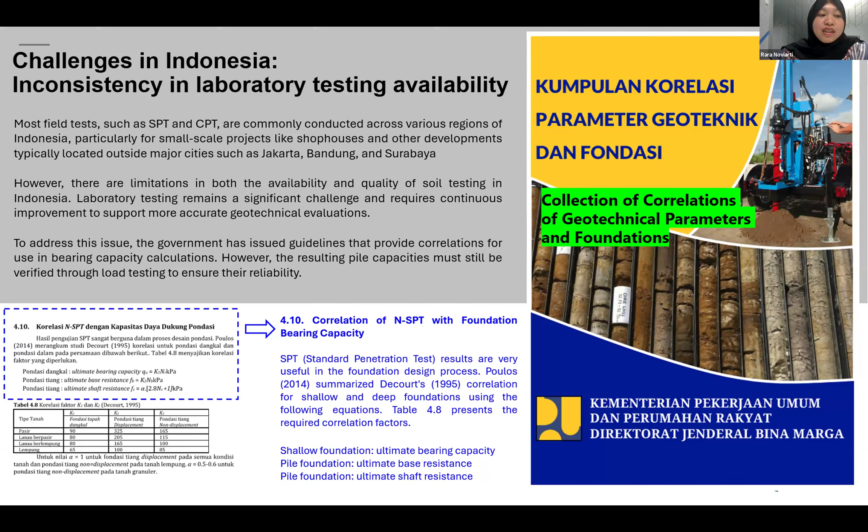However, it's important to note that these correlations are only a temporary solution. They are not a substitute for comprehensive testing. Therefore, load testing remains essential to verify the actual pile capacity and ensure the safety and reliability of the foundation system.

However, in practice, conducting this test becomes more complex when the cut-off level is much deeper, as you can see here, like 30 meters below ground level. In one of our projects, we performed a preliminary test pile with instrumentation, using VWSG here, every 3 to 5 meters.

Interestingly, we found that even with the double layer geogundle, some load still can be read in this VWSG above the cutoff level. This highlights a key issue: current construction methods have not yet fully eliminated the influence of friction above the cutoff level. So if loading test is conducted without this instrumentation, the measured capacity might not accurately reflect the true in-situ condition.

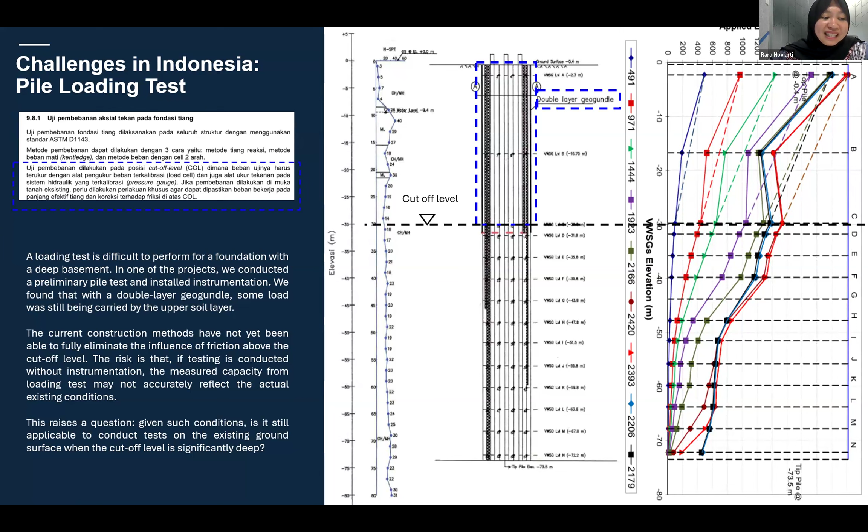So I have a question: with this condition, is it still valid to conduct pile test at the existing ground surface when the actual cutoff level is much deeper? Yeah, and that concludes my presentation.

I truly appreciate the opportunity. I look forward to any feedback or discussion, especially since we have many experts here.

Thank you. Rara, beautiful. I like the way you clarified and put together and organized those slides, really very nice. Thank you. They're challenges and real guidance for all of us and young engineers especially. So we are closing this with your remarks.

Thank you all, I don't know if you want to add anything before we close this session. I can't thank you enough. You really are contributing to the international society and the entire community of geotechnical engineers around the world. Thank you very much. Thank you for inviting us. Anything you want to add? Thank you, it was a pleasure to see you. Bye-bye, my pleasure.